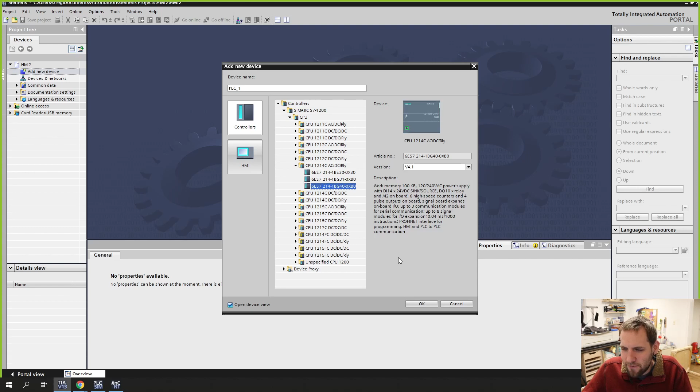All right, so let's do this from scratch again. We're going to add a new device. We'll start with the PLC. We're still sticking with the PLC we use in class, which, if you don't remember, is the 1214C AC/DC Relay BG40. Just a quick reminder for you.

Now we have to wait for this thing to load. All right, we've got our PLC added. So now I'm going to create my tags, and I'll do it the proper way this time instead of throwing them in.

Start, stop, output. Remember, make sure you set your output right. And then HMI start.

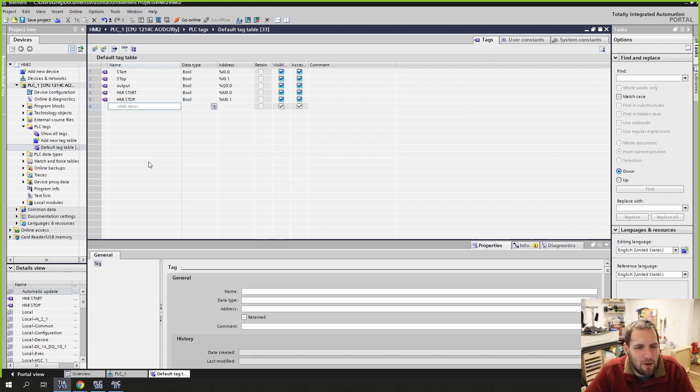Just a reminder, I like to start at memory 3, M3.0, instead of doing M0.0, because that will keep you from having issues later down the line if you add the flashing clock stuff and the memory byte, the system bytes, those things. So I just like to start at 3. I don't have any good reason why I picked 3. I mean, if you think about it, the clocks use 1, the system bytes use 1, so that's 0 and 1. So in theory, I could start at 2. I just go to 3 to put a little buffer space in there just in case.

So anyway, I've got all my circuits there. Now I'm going to go ahead and write my program.

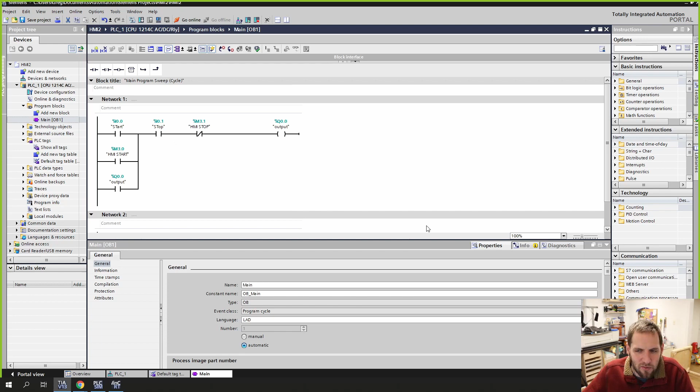So just start, stops, all that fun stuff. Let me blow this up a little bit so it's easier for you guys who need it bigger. All right, so standard latching circuit. We just added a second start for the HMI and a second stop for the HMI.

Now, once you guys do get to the simulation point, what you can do is right-click on PLC 1 and just say Start Simulation. You have to do this the first time, and that will make a new window pop up somewhere on your computer screen. Once that gets started, it's like plugging your PLC in. It does take a minute or so to get it all up and running.

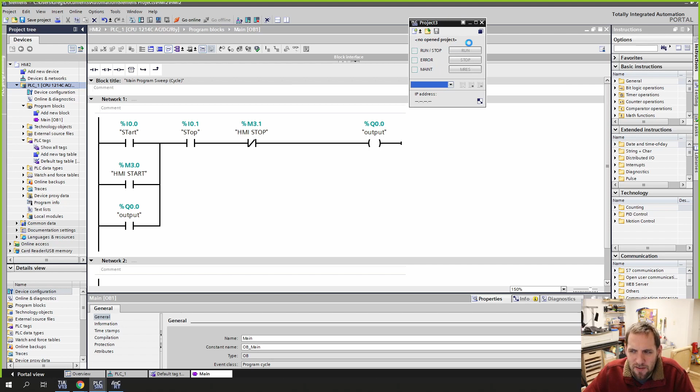It will then walk you through the normal download process. As long as you don't exit out of this screen, you don't have to do start simulation every time, for the PLC. I'll be very specific about that—we don't have to do it for the PLC. For the HMI, that's a whole different game. All right, so anyway, let me go ahead and exit out of our HMI.

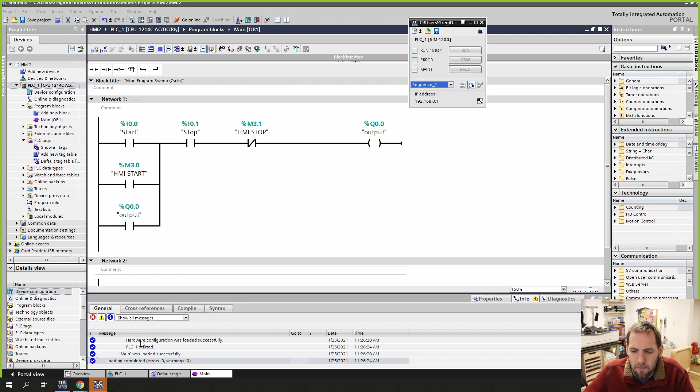As you can see, that is up and running. Here is our screen. All right, so those are kind of like your two important screens, I'm going to call them. This one shows you... I don't know why it's not showing me anything right now. Okay, let's try this again, because one was running, one wasn't. Or is this? That might have been my old one.

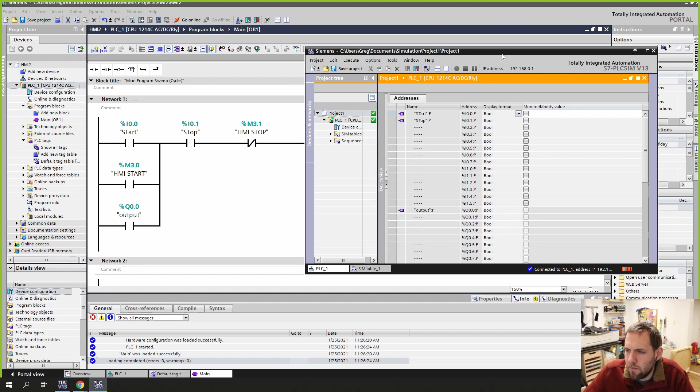There we go. It might show you—it's probably going to start you in the compact view. All right, so you have to click this button down here to get us to the bigger view. And there was another view that we had that I don't remember how I got to, that actually shows us everything and keeps it on top. I don't remember how I got to that other point—there was another one, but anyway, so we got our PLC up and running.

Now again, if we look at our devices and networks, we only have one device. So now we're going to add a new device. We're going to do HMI, 7-inch, basic, and we're going to make sure you do that PN option. PN is saying Profinet, all right? DP is saying Profibus, DP. So you want Profinet or Profibus?

Profibus is basically a serial modification. Profinet is Ethernet. We want the Ethernet one, so we're going to use PN. And we're going to say OK. Now that is adding the HMI just like we did.

Now, if you just hit finish right off the bat, you're good to go. You can walk through this—you can select your PLC here. I'm purposely not going to, so I can try my whole drag-the-tag thing over again and see how that works.

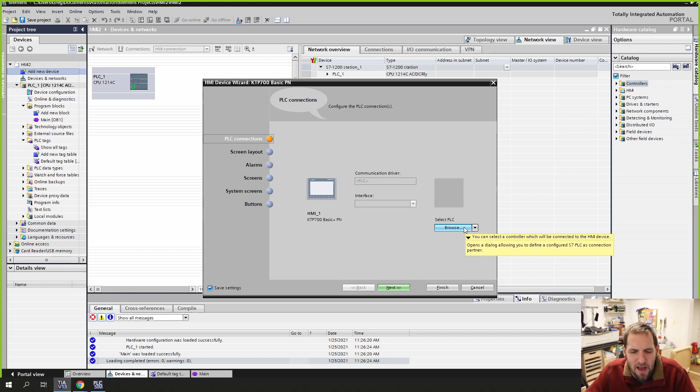Maybe I'll make myself look like a fool, but anyway, let's move on.

We could change the resolution. Well, we can't because ours is set, but you can choose whether you want the date and time in the header, or no header at all. You can also change the alarms, which is that little screen that pops up.

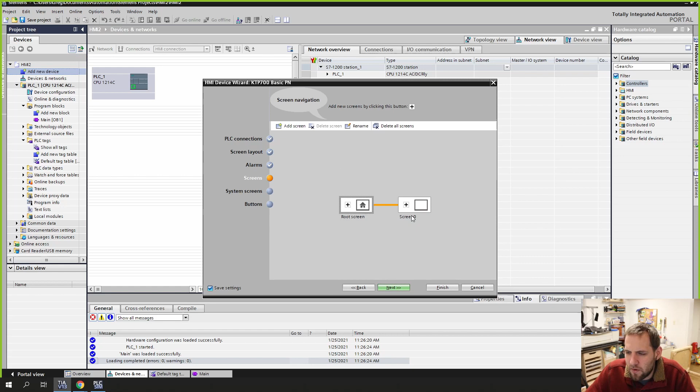Here you can make more screens in the root screen if you want to, or we'll just add a screen for fun. Here we can see our system screens, so whether we want access to things.

Then we have our buttons across the bottom. Here we have some more system buttons that we could drag and put places if we wanted to, and we'll just put them there for good measure. We'll go ahead and hit finish, and now our HMI will get added.

And again, I come up here, no network connection, no HMI connection. On the HMI itself, we're now going to create our tags.

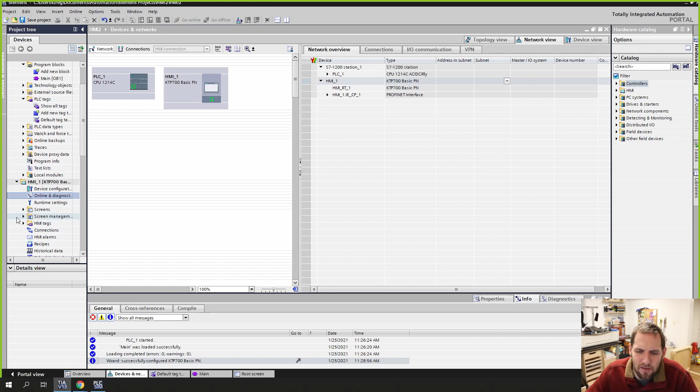So we're going to go to our HMI default tags, and I'm going to cheat this again by finding my PLC tags. I'm just going to click it once, not twice, twice will make it maximize to here, and that's not what I want. I want to click it once so it shows them in my details view.

Now I should be able to just drag and drop, and boom. Notice how I get no red connections, my connections are filled in, my PLC name is filled in. Let me go grab my output and drag that up in there. Now again, if we come back and look at our devices and networks, notice the network connection, the HMI connection. It automatically made those two connections when I dragged those tags in.

If you don't drag those tags in, you're going to have to either manually come up here and add this thing in here. Can I undo this? Let's see how far I can go back.

Okay, no, I just deleted the HMI. All right, let me quickly put the HMI back in.

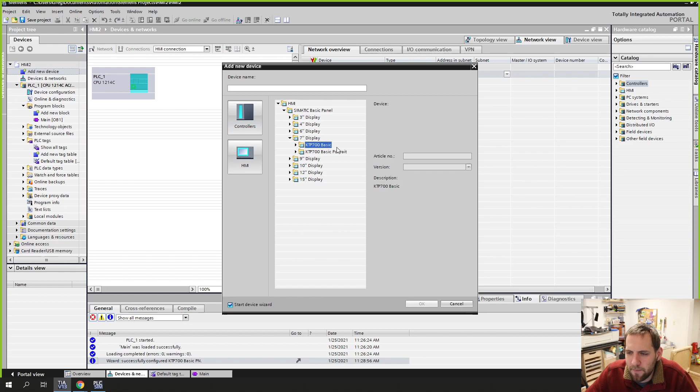So remember, if you drag those tags... Now, if you do select your PLC here, notice it puts the interface, it puts the green line between them. I'm just going to click finish to go quick this time. Come back to our devices and networks, notice our connections, there's a green line, our network, there's a green line.

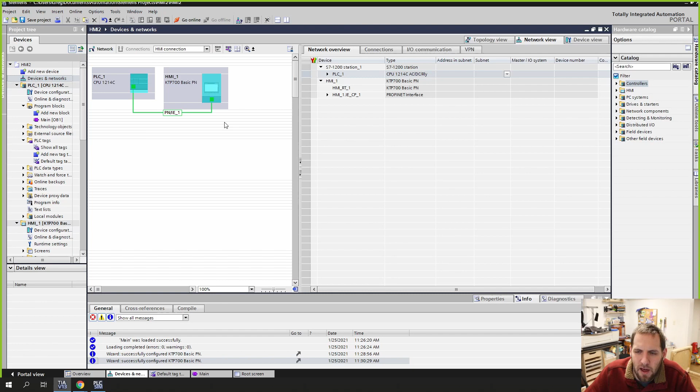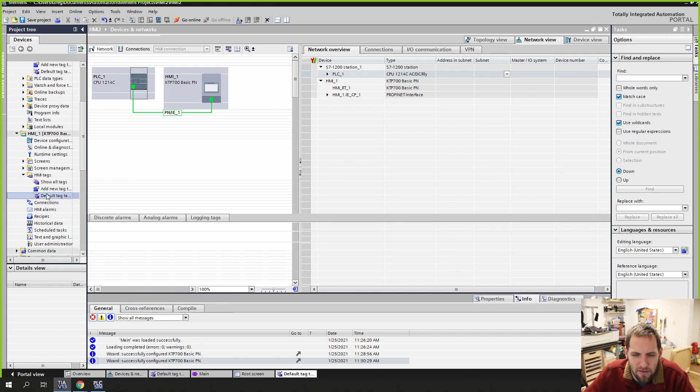So there are three different ways to do this. Way 1 is to select your PLC when you're making your HMI, like I just did. Way 2 is to come to devices and networks at the top of your tree and manually drag and connect them together. Way 3 is to drag your tags from your PLC to your HMI. So those are your three different options, and as I said, I like dragging them because it keeps me from having to make them by myself.

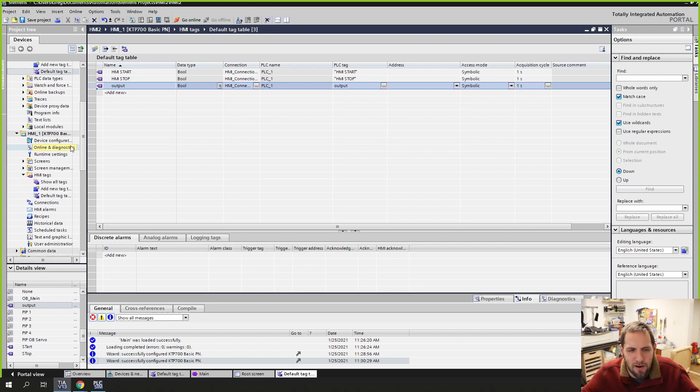All right, so our PLC has tags and it's been coded correctly. Our HMI has its tags, but we haven't coded it, right? We haven't created the screen. So now we're going to go to our screens and our root screen here.

All right, we'll add some buttons to this. So we've got one button, and again, I'm going to make that my start button. We'll add another button and make that one my stop button. Then I'm going to go with a square this time because why not. Go ahead and throw my text in there and call this output.

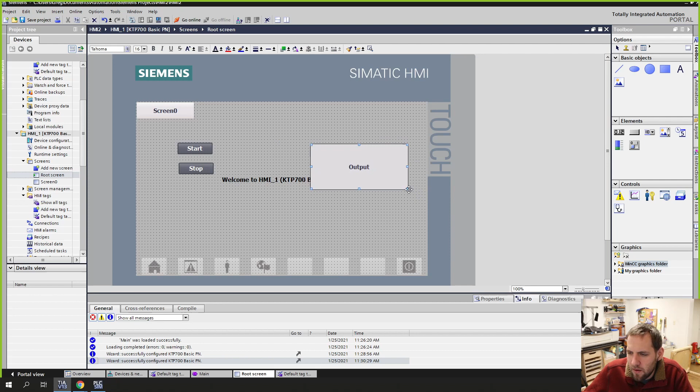And kind of get that centered, and let's group those for good measure. All right, so I have this. Resizing, what's that do? Yeah, it resizes without moving the text. Hey, I told you to group. Wow, that's wonderful. There we go, all right.

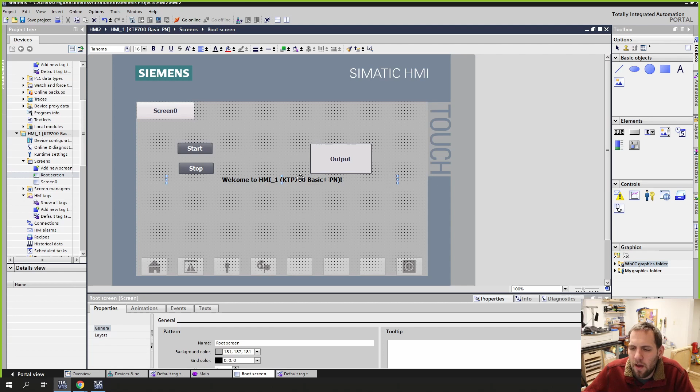So we've got our very simple HMI here. I've got my output, I've got my two buttons. Let's make those bigger to make them a little touch friendly.

All right, so now we need to add the events so the buttons actually do something. You're going to right click on start and say properties. If you don't already have this open, you could also click on events directly.

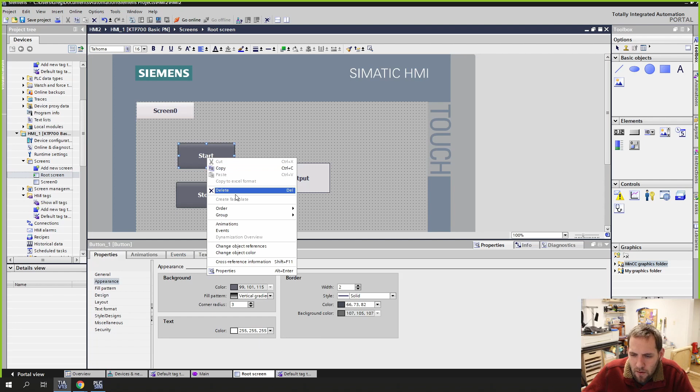On press, we're going to go with set bit, and I'm going to go with while key press because I think I like that one better. And I'm going to go ahead and put HMI start in.

Now, the other thing you will notice, which is really kind of nice, is if you notice there are two different tag tables down here. There's the default tag table, HMI start, and then there's also the PLC1 underscore controller tags folder underscore default tag table underscore backslashes, HMI start. If you were to click on one of these two, it would automatically add that tag to your HMI tags.

All right, so I can just click on HMI start there, and then I can do the same thing here. And I'm just going to go with standard set and release on this one, just to show you guys two different options. So we can do a set and we can do a reset.

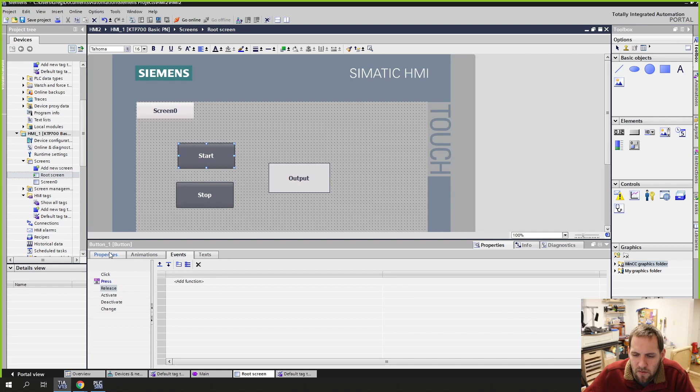HMI stop. All right, and again I changed the colors just as I wanted to. So fill pattern, I went from vertical gradient to solid, which then allowed me to pick my colors. Go with a nice dark green, solid, and we can make that one like a nice dark red.

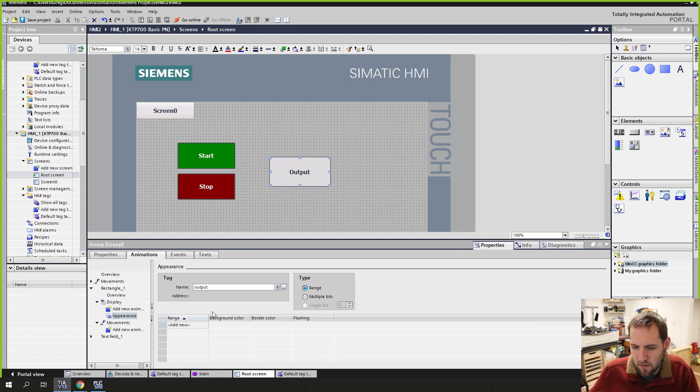Then on our output, again we're going to do those. We're going to do the rectangle. We're going to do a new animation—oh, not animation, sorry, appearance. And we're going to go with output, 0, 1. So when we're stopped, we're going to make it a nice bright red, and when we're started, we're going to make it a nice bright green. Notice it didn't change color yet because it doesn't have a value for that tag.

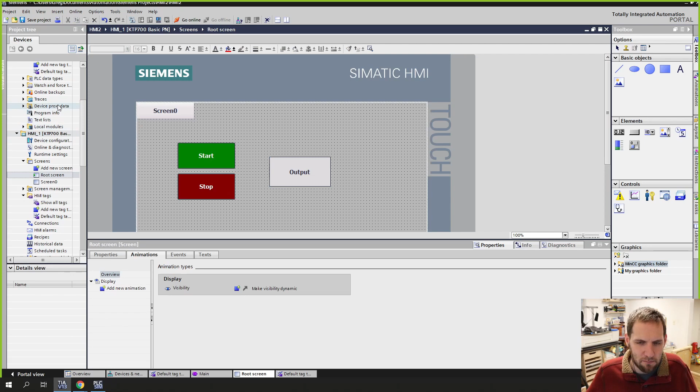All right, we've got our tags created, we've got our colors created, we've got our PLC up and running, as we can see here. So we're going to go ahead and right click on our HMI, and we're going to go start simulation. There we go, we have our HMI started.

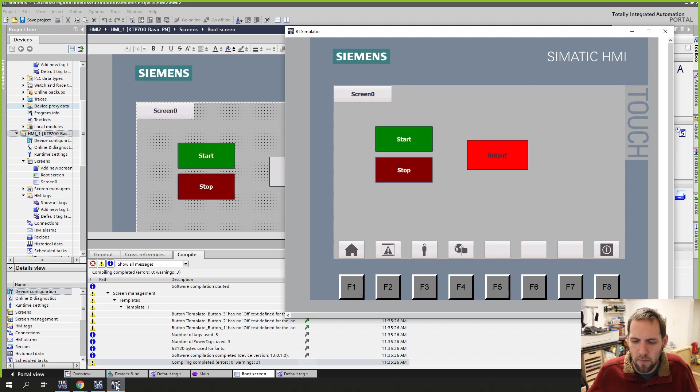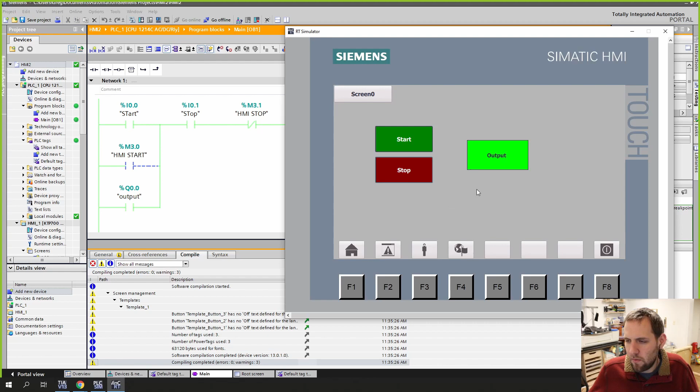There we go. Let me undo my start button. So now I hit stop, output does turn off. When I hit start, output does turn on. It didn't make it go invisible, which I'm a little bummed at. I'll have to go look at that to find out why.

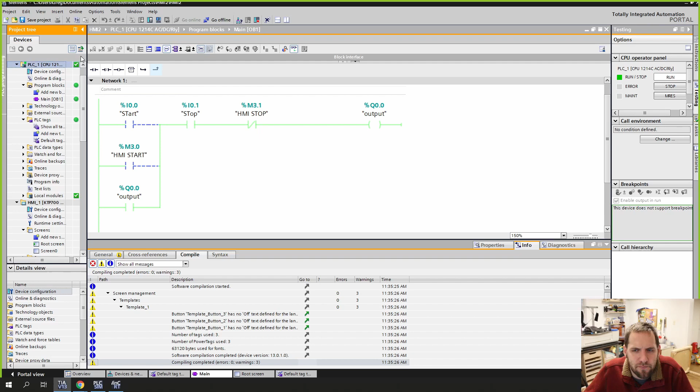Now you will notice if I click on HMI over here, it won't let me do a download or an upload. If I click on a specific screen, it won't let me do a download or an upload. The HMIs are weird. If you guys remember, with the PLCs, if we're online, we can upload or get all the information that is on the PLC and put it into the program for us if we, for some odd reason, lost our program. The HMIs, we cannot do that with, and it drives me bonkers. I don't know why we can't do it, but we can't. So just something to be aware of.

Am I sharing? I don't know what I am sharing. Hold on, can you guys see my picture in the bottom right-hand corner?

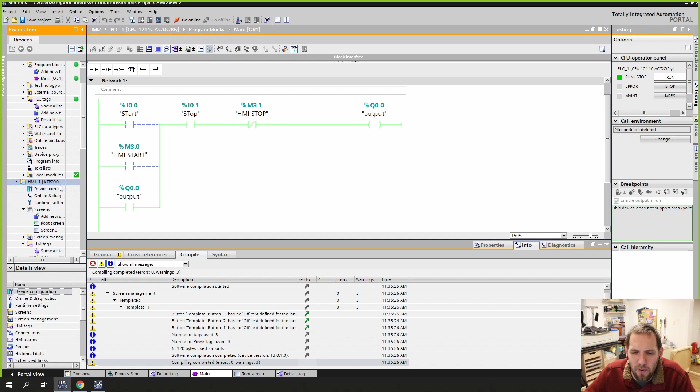The HMI we can't upload from, and I don't know why that is. It's very annoying to me that we can do it on the PLCs, but we can't do it from the HMI, and it all has to do with the coding. I'm sure that it's just how the software works. I think these are running a version of Windows, the HMI screens. Windows CE, I believe, is what it's called, which you'll never actually really see the Windows part of it. You might see it for a brief second, but you'll never really see it.